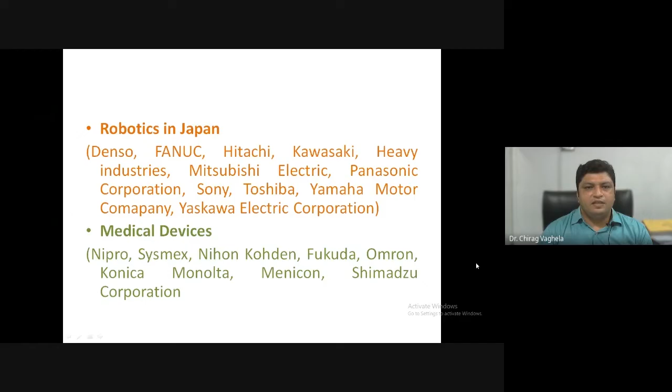Being an Indian and working in the field of physical education and sports, we should take it as a case study to prepare ourselves to host an upcoming Olympics. Our Honorable Prime Minister is already trying to get approval to host the Olympics in Ahmedabad in the year 2036. So this will be a useful study for all of us.

Japan has also demonstrated excellence in space exploration, intensive mathematics, and there is a culture of having good quality engineers at the workplace. They are world leaders in automotive engines, television technology, video games, optical clocks, and other fields like robotics, restaurant operations, and hospitals.

Now, why is this technology important? It's a fuel cell electric vehicle, so it is powered by hydrogen. Means as a fuel, this car requires hydrogen and oxygen. On this combined fuel, it runs 482 kilometers on a single charge, and it takes only 4 minutes to get refueled. It only emits water vapor, hot air, and that's it. No smoke, no carbon dioxide, no carbon monoxide, no other carbon particles in the environment.

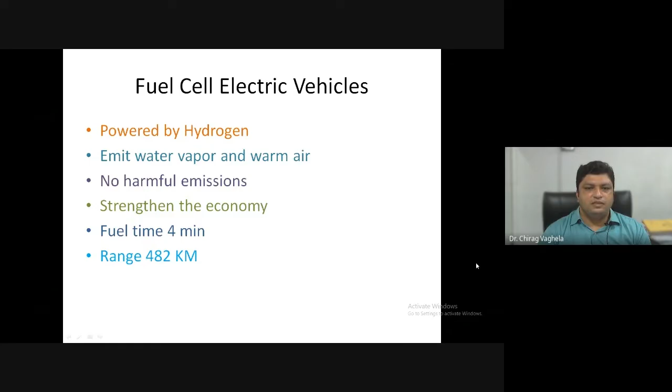So there are no harmful emissions from this vehicle, and it also strengthens the economy because you do not need to import crude from other countries to run such a vehicle. That's why this kind of vehicle will be the future, and in the near future we will also see such vehicles used in upcoming Olympic Games.

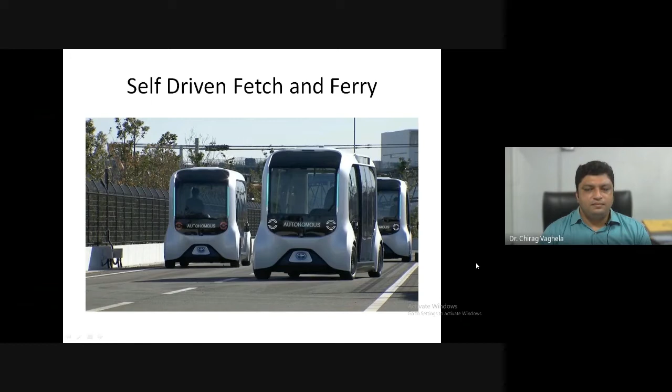Another service they provided was the self-driven fetch and ferry. It was an autonomous vehicle. Why was this vehicle used? First of all, it was a self-driven vehicle. Means the vehicle does not require any human power to drive it. There was no driver in it.

Suppose it was not a self-driven vehicle but a normal manually operated vehicle, then there might have been some challenges during operation. First of all, the language. The local driver may not be able to communicate with you in your language. They are Japanese people, so such miscommunication may take place when you talk with a person who doesn't know your language. So that error has been reduced. Another thing, there are multiple spiral bridges in Tokyo and many other world-class cities.

So when some human drives on such a path or track, there is a chance that he may choose the wrong path, go in a wrong direction, or choose the wrong lane. But as these vehicles are already programmed to run on a particular path, there is less chance that the vehicle goes to some other location which is not programmed. So it saves time and efficiently transports people between departure and arrival points.

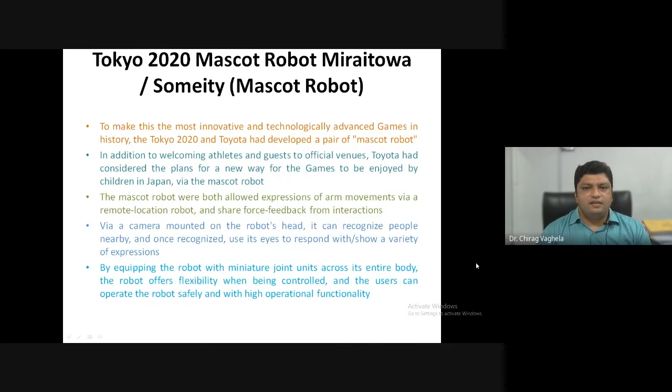They had cameras installed in their foreheads, so they could help the technical team broadcast live as well. They were also trained to identify the age and gender of people, and accordingly they can change the screens of their eyes. Their eyes are actually not a drawing or painting, it's a digital screen. So they respond according to age and gender.

Like if a spectator is a toddler or a small child, this robot will react in a different way. It will have a fun kind of interaction, whereas if someone is very elderly, this robot will ask them about their health, what help they require, and what information they are looking for. So that kind of program has been installed in this robot.

Another and most important robot was the FSR, Field Support Robot. These robots were programmed to replace the volunteers. Especially, they proved themselves very helpful in throwing events.

Once the athlete throws the javelin, disc, shot put, or hammer on the field, the official nearby just has to lift up that object and put it in the FSR robot. Then the FSR robot has a program; it finds its own way, and without any collision or going through any obstacle, it goes straight to the point where the items are to be submitted.

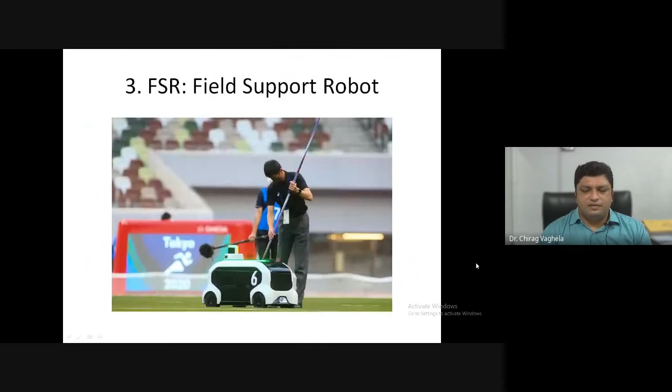It also reduces the time, because it doesn't go for a lunch break. This kind of robot doesn't need smoke breaks or loo breaks. So it works continuously, and it also synchronizes with other robots to avoid injuries.

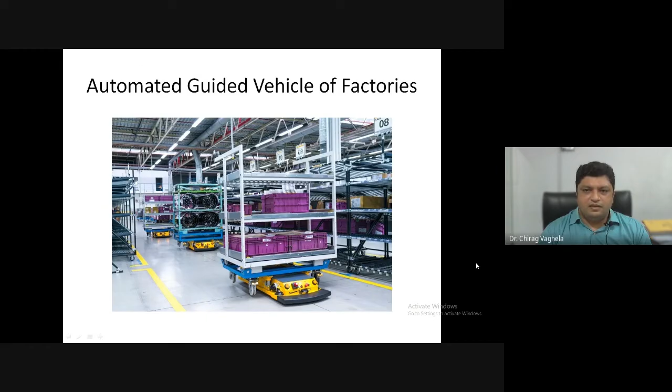So basically, it works on laser-guided technology. Once you bring this robot to your location, your home, it will assess the entire space on its own, create the map accordingly, and then start its work. Vacuum cleaners are designed on a similar concept. You might be aware of such vacuum cleaners currently available at home, and these combinations of technologies are placed in the field support robot.

Now, there is another wearable robot developed with technology produced by Panasonic, and the company's name is ATOUN. These robots work especially for Paralympic athletes, elderly people, people who cannot walk without a caliper, or people who use a wheelchair. These people can wear this robot, and it helps them to stand, to walk, and lift weight also.

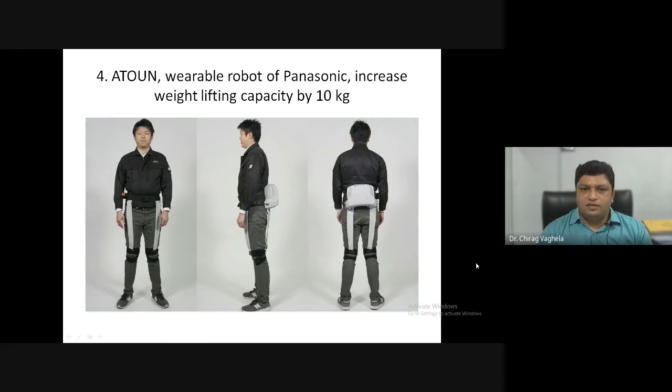So volunteers who are shifting goods from one place to another can take help of this robot, which actually increases the weightlifting capacity by 10 kg. These robots were used by volunteers shifting items, and are being used for Paralympic athletes also. People with locomotor syndrome and musculoskeletal disease can use this robot.

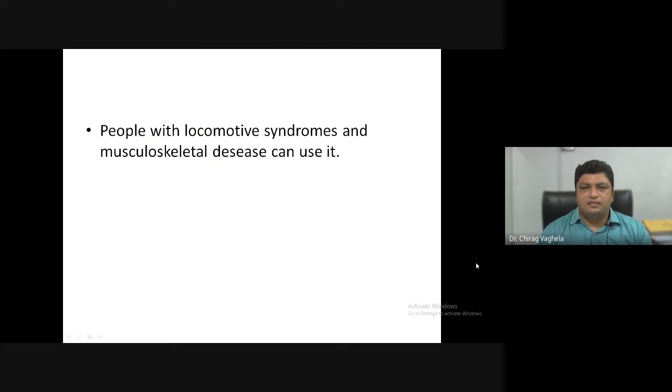Another robot was THR3. THR3 was primarily designed to do remote operations in the medical field or to work as a volunteer. Basically, THR3 mirrors the actions of the controller who is operating it. So a person at the stadium doesn't need to run after people to pass any message. If you want to call someone, you don't need to go to him physically. In the COVID situation, you have to maintain social distance also.

So on your behalf, the robot THR3 will go to the athlete and tell them that they are at the wrong place, they have to go to the starting line or the reporting desk, or they are called to receive this item or that item. This kind of work was done with the help of THR3.

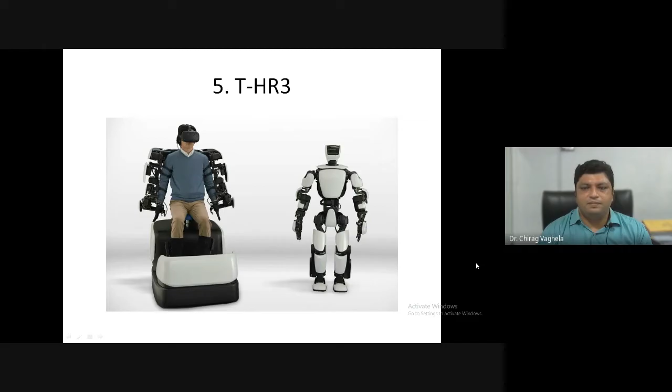This robot is actually capable of performing medical surgeries also. The doctor can remain in his own country, and if he is not able to travel, the robot in that city or country can perform the operation as per the commands given from the controller. A VR display is used by the doctor to get the real view of the scenario, transmitted through the camera installed in the head of THR3. It was also used as a volunteer moving around the stadium helping people.

There were some other robots also introduced in these games. There was the T-TR1. The best part of T-TR1 is that it had a large display. Currently we use mobile phones for video calling, but this large lifelike screen helps create a lifelike scenario, like the user feels he is communicating with a person just behind the glass.

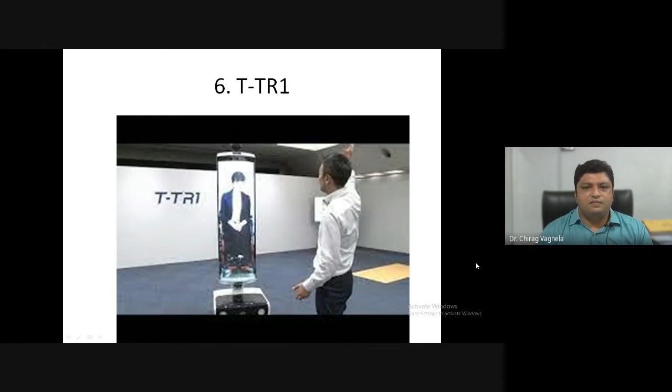It is quite portable and was used to provide information. When there is a group residing in the Olympic village, this robot goes and displays the information on the screen. Any change in program or any upcoming bus transport plan can be displayed on this live movable screen. So that robot was used for those things.

These robots used to move around, identify the people, and hand over the things to them. It was also supposed to be used in the stadium, but there were limited spectators. Only the officials were allowed. So if they needed water or some consumable item, these robots were delivering them.

The human support robot, which is the tallest one with the monitor screen on it, was used to help exchange information and also for identification and verification. It was placed at the critical point, the entrance point of the event, where you have to show your ID card, and the camera of this robot used to recognize whether the person showing the ID card is actually the person wearing it or not.

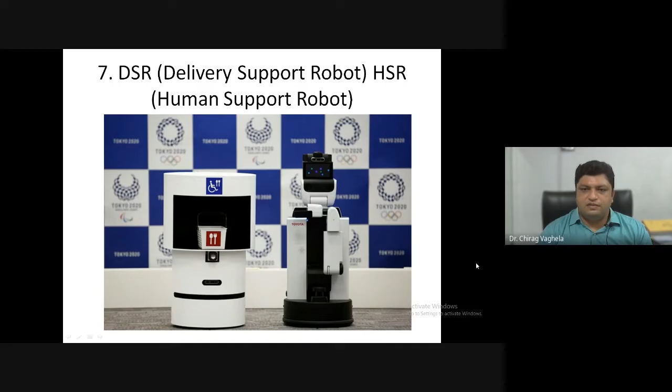Only after the recognition was this robot allowing athletes to get into the arena. So this way, robotics science was used in the form of robots. There were 3 other robots, but they were not used for the Tokyo Olympics.

The most advanced thing that happened in sports research was Intel's technology merger with the Alibaba cloud service. They have developed a 3D athlete tracking system. Previously, to do biomechanical analysis, real-time analysis was not possible.

You had to call the athletes to the research laboratory or the studio, where we had to place several white balls, sensors, magnetic items on their body, and then connect one point to another and make our own skeleton structure. Then we had to save that video and give it as input to the software, and that software used to give the data.

But now Intel and Alibaba combined have developed a technology where real-time live analysis is possible with the help of a camera only, a simple camera or mobile phone. And that was provided live at the venue to the coaches. So you are able to see the biomechanical analysis of your own athlete as well as the competitors.

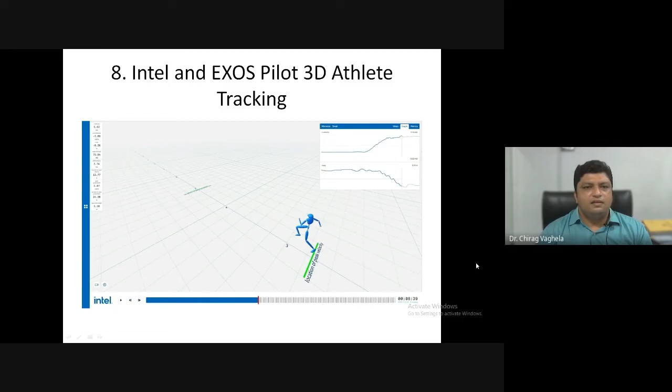And what kind of data did it provide? It was able to provide visuals for biomechanical analysis, body angles, stride length, acceleration points, all in real time. And it has also helped to analyze other athletes, because whatever your camera is capturing, it is able to analyze the movement of all the athletes.

And this data you can use to develop the required shoes, rackets, or other equipment as per the information and the interpretation done by you or the analyzer. The specialty is no sensor is required, as I said earlier. Only the athlete is required in camera, and you don't need to bring the athlete to the studio or any lab. On the field, when they are actually participating, you can collect the data. That is the most amazing thing.

And the data they were providing was size, skeleton structure, then an analysis matrix with the peak velocity position and peak acceleration position, so at which point the athlete was at his top speed, those kinds of things. Average stride length, stride count, how many strides he used to complete the distance, then animated key points, and such data can be downloaded through paid services.

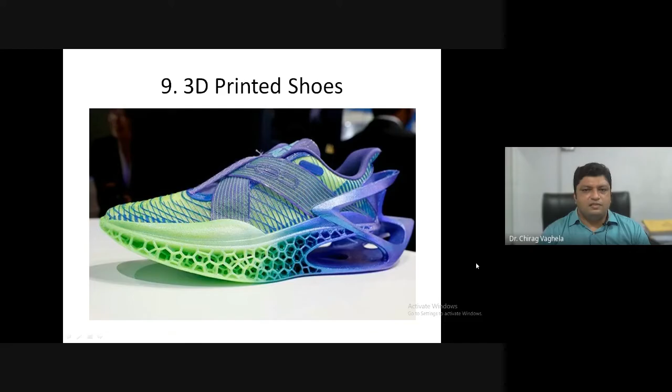You can make it as per your requirement, just like you are taking a printout from your computer as per your requirement, doing adjustment in your Word file or your Photoshop, and you get the printed photo. The same way this technology works, but in 3D pattern. So this kind of sole.

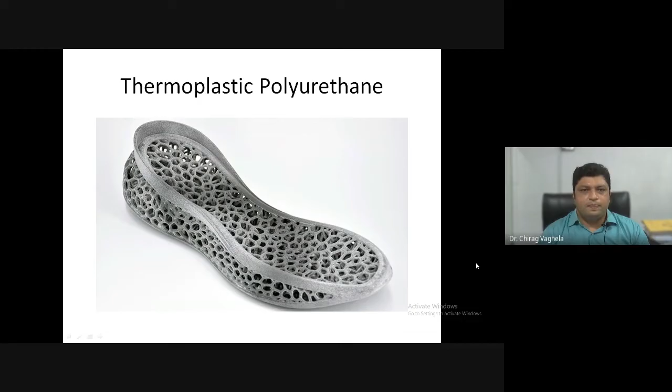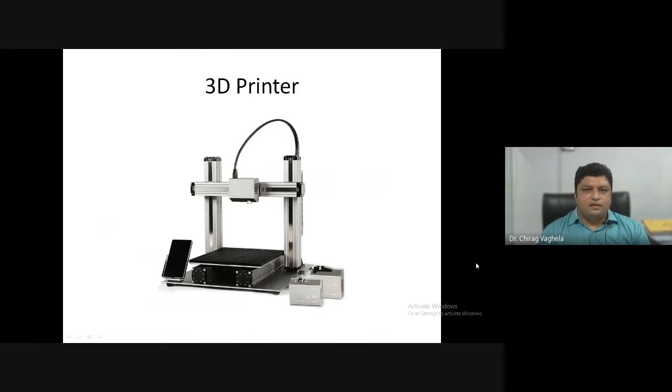So what are the advantages? First of all, you can design according to your requirement. You can try new manufacturing processes. You can do experiments and you can try multiple different types of shoes. Then it has numerous possibilities. You can have completely 3D printed shoes. You can have partially 3D printed. You can club the 3D printed sole with the fabrics, with the rayons, and that way you can do numerous things.

It's environment friendly because it uses recycled plastic or used plastic, and high performance material is developed. I have seen multiple videos of this kind of shoes, and they are very flexible. They absorb the shock very nicely, high elasticity, they are very flexible shoes. It can return the energy. It can work upon Newton's third law, action and reaction, very nicely.

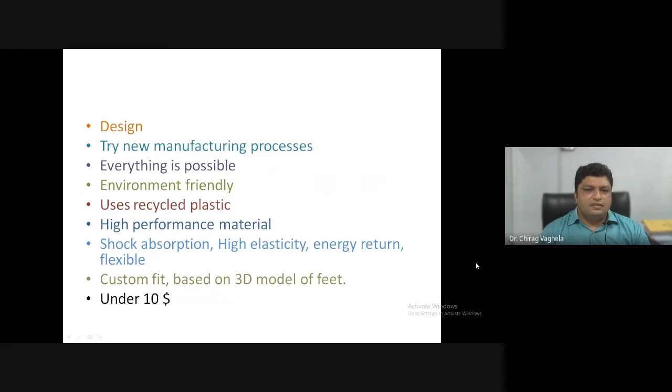It's custom fit because the material is a rubberized material, and the cost is less than $10 per pair. It's very cheap. Another technology was used and introduced by the company called Speedo, and it has designed the swimsuit for the American swimming team. The fast skin suits, as there are two different kinds of swimming costume they have developed.

And what were the benefits of this swimming costume? First of all, this kind of swimming costume was used by more than half of the world record breaking swimmers. Three new fabrics have been designed. Actually, this kind of swimming costume was banned previously. After some modification in rules, regulation, and modification in garments, the company has developed the new product with the new kind of material. So it improves the flexibility.

Even though swimming costumes are supposed to stick to the body, still it was developed to maintain the flexibility of the athlete and itself. Then compression. Compression is very important. In an upcoming slide, I will demonstrate why this compression is important. And it reduces the drag. More lightweight Valor. There are two suits. The second suit was the Valor, which is specially designed for compression and to increase the buoyancy.

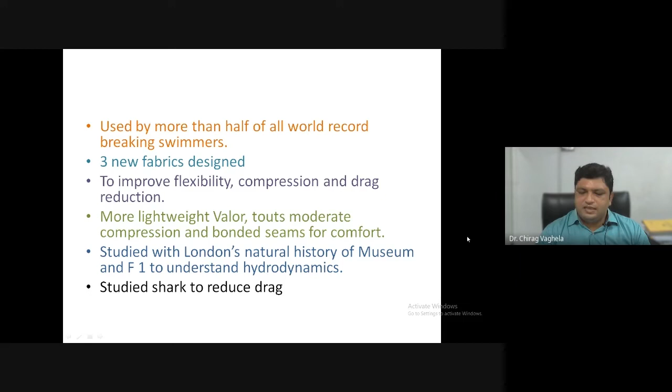The entire suit was designed with the help of the Natural History Museum, London, and Formula One to understand the hydrodynamics. So they used the aerodynamics chamber to assess the hydrodynamics, because Formula One people are always doing experiments and research on aerodynamics. So the same infrastructure was used to measure the hydrodynamics. And they studied the shark's movement and skin to reduce the drag.

So the compression basically gives shape to the torso to maintain the buoyancy. It increases the floating capacity of the body, and it also compresses the hip area, which reduces the resistance. And the third benefit is that the swimming costume moves the water in such a way that drag also gets reduced. So that was the invention of the Speedo company.

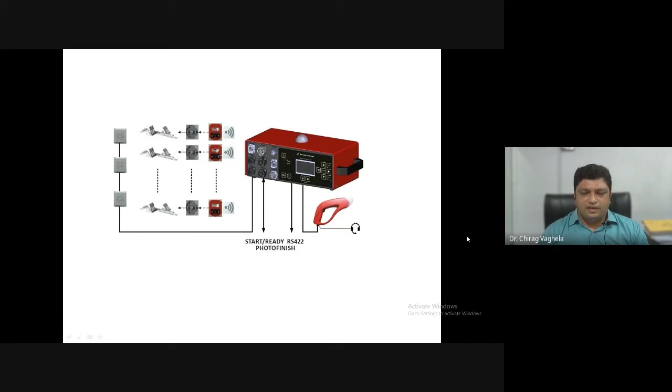And these red boxes detect the release of pressure, because when athletes place their feet on the block, constant pressure is received by these devices. So here in 2011, Usain Bolt was disqualified due to a false start. These gray boxes you can see are the devices placed behind the starting block, and this is the receiver connected with the starting gun. So this device calculates the reaction time and accordingly decides the false start. You can see this device in detail.

Previously, an average of 28 false starts used to take place in a single major event between 2007 and 2010. And after the introduction of this technology, only 10 false starts in a major championship.

And the precision is very high. It is able to measure 1 millionth part of the second. Previously it was 0.5, now it has changed to 0.1 part. Okay, so that is great, like 5 times better technology was used.

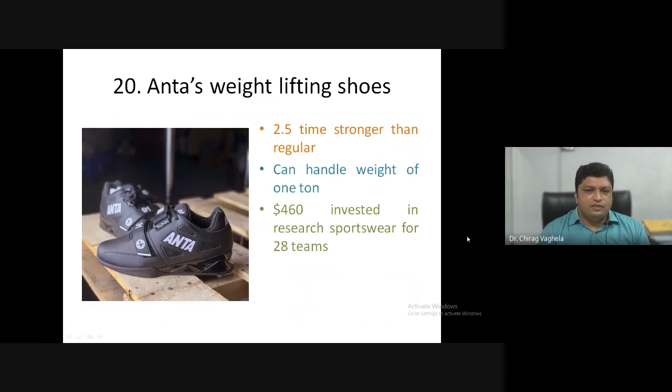Now this is quite interesting. Anta is a Chinese company. The Anta company has made weightlifting shoes for the Chinese team. They have spent $460 million in research of sportswear for 28 teams of China. These shoes are 2.5 times stronger than regular weightlifting shoes, and they can handle a weight of 1000 kg. So this kind of innovation is done by Anta.

This time Anta has developed an anti-grab suit for wrestling, so the opponent cannot easily grab the Chinese wrestler. So these kinds of innovations they have done in this Olympics. Anti-grab technology: they have specially designed fabrics which reduce the friction, and they have also developed new components for competitive gymnastics and trampoline. Those suits give compression, reduce the impact of wind in the air, and help the athletes maintain their position and posture, or change direction when they are aerial. Means when they are in the air, they are able to reduce the effect of wind.

In the OBS, pioneer broadcasting technology, this time a high level of broadcasting technology was introduced. Previously, everything was delivered on live television. Now people are using more cloud-based technology, so lots of data has been consumed. So ultra high definition dynamic range was introduced in the television recording, and in all the arenas a total of 3600 microphones were